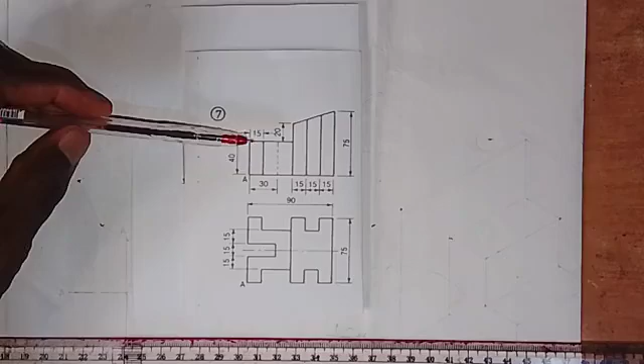Back to this channel. Here we are going to be working on the conversion of these orthographic views into isometric view, as these views are given in first angle orthographic projection. This is the front elevation and this is the plan.

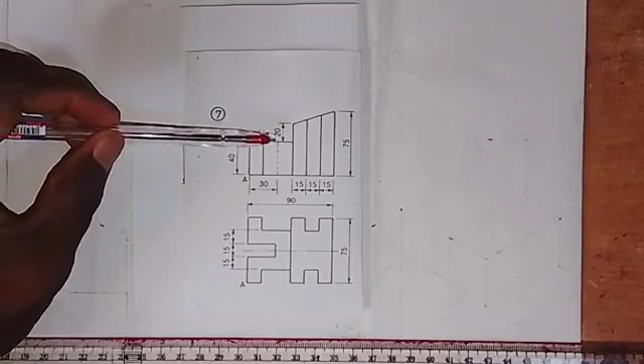For the dimensions on the front elevation, we have that from here to here is 75, and then from here to here is 15. This is 15 from here to here, 15 from here to here. And then we also have that from this point where we have this short dash line to this end, we have it to be 30 millimeters. From here to here is 40, from here to here is 15, and then we also have that from here to here is 20. Okay, that is for the front elevation.

The lowest point is indicated with letter A here, and in the plan, we have that from here to here is 75, the total from here to here is 90, and then we have that from here to here is 15, from here to here is 15, from here to here is 15, and the lowest point is also indicated here with letter A in the plan.

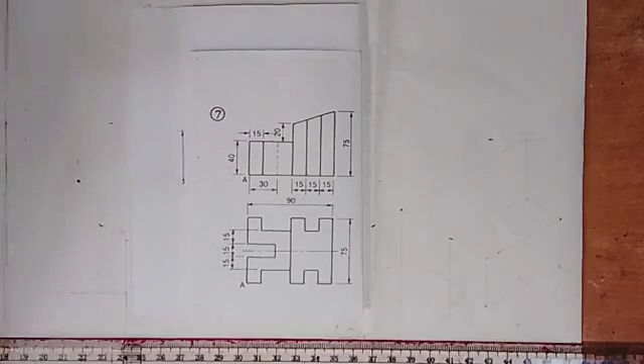So we are going to do this work this way by producing the shape of the front elevation without this line, without this line, without this short dash line. So let's see how this can be done.

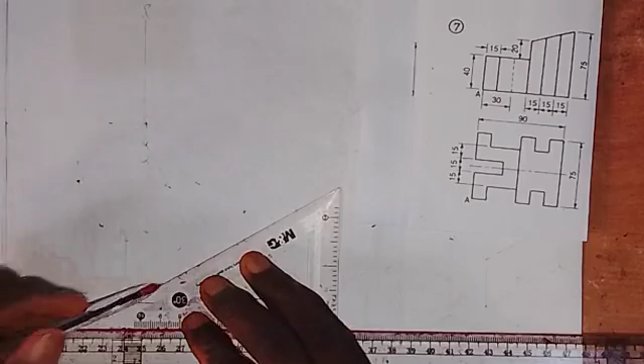So what we are going to do first is draw a short horizontal line here like this. Okay, then with my 30-degree set square, I'm going to draw a line in this direction from this point, and then at this point I will draw a short vertical line up like this.

Okay, then I'm going to indicate the lowest point with letter A as we are given in the front elevation and the plan. So this is letter A here as the lowest point.

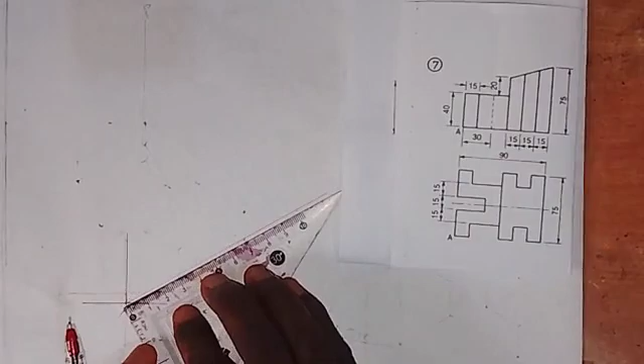Alright, so as I said that we are going to produce the shape of the front elevation, that's what we are going to do. So let's first of all take the measurement of 90 millimeters from this point A to this end. This is 90 millimeters here, and at this point here I'll take a measurement of 40 millimeters up to this point. Okay, so this is 40 millimeters.

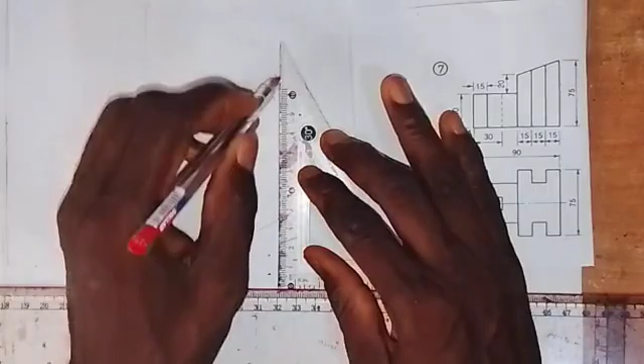So I'll come to this point here where we have taken this 90, and I will draw a vertical line from this point up like this, and then on this line I will take a measurement of 75 millimeters from this point. So this is 75 millimeters.

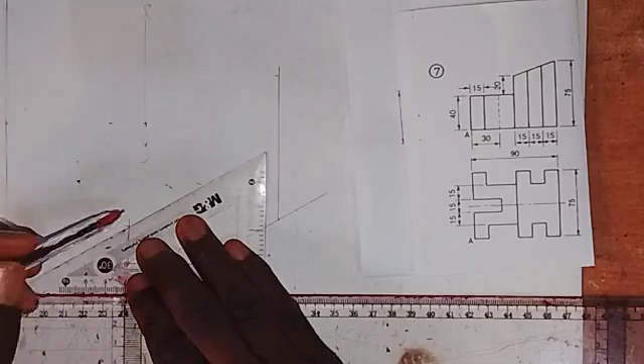Okay, then I'm going to come to this point here and I will draw a line from here. Sorry, not a horizontal line, with 30-degree set square I will draw a line in this direction.

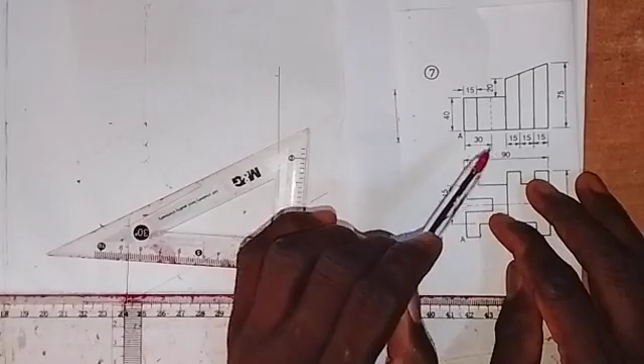All right, so then the total length from here to here, I need to work it out. So here we have that from here to here is 30, and then this is 45. That is from here to here 15, from here to here 15, from here to here 15. That's 45. 45 plus 30 gives us 75. So it means that from here to here is 15. So that is what we have there, so that means the total from here to here is also 45.

So I'm going to take a measurement of 45 millimeters here, from this point. So this is 45 millimeters here. So at this point here I'm going to draw a vertical line up like this.

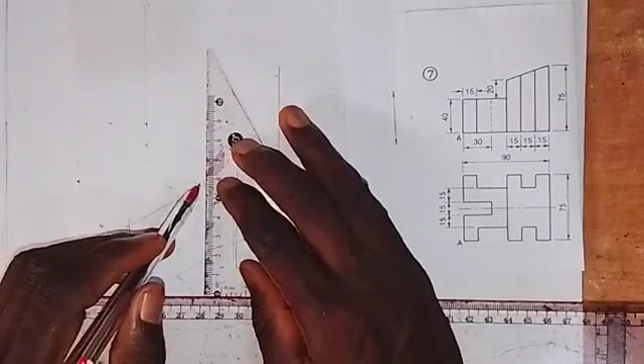So this is a vertical line, and I will take a measurement of 20 millimeters, as we are told that from here to here is 20 millimeters. So I'll take 20 millimeters on this line. This is 20 millimeters. And then so where we have this 75 here, I'm going to set my set square like this.

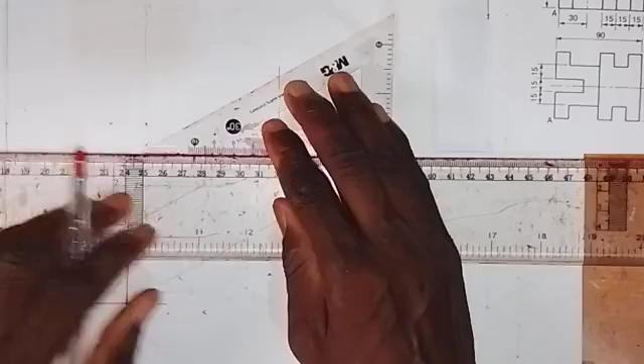Okay, then I will draw a line from this point in this direction, draw it forward like this. Okay, so this 20 that we have here, we are connecting this point together. This point where we have this 75, I shouldn't have drawn this line, I didn't really look at that.

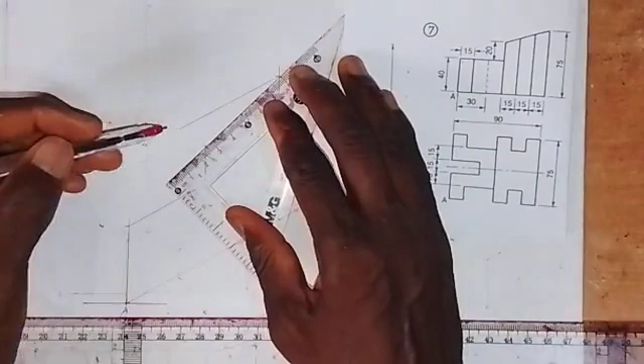So we join this point where we have this 20 and where we have this 75, we join them together like this. So look at what we have here, this line is not needed. So look at what we have, look at the shape of the front elevation.

Apart from the lines that I said I'm not going to draw, we have the shape of the front elevation in isometric view. This is an isometric view, while this one is what is in orthographic view.

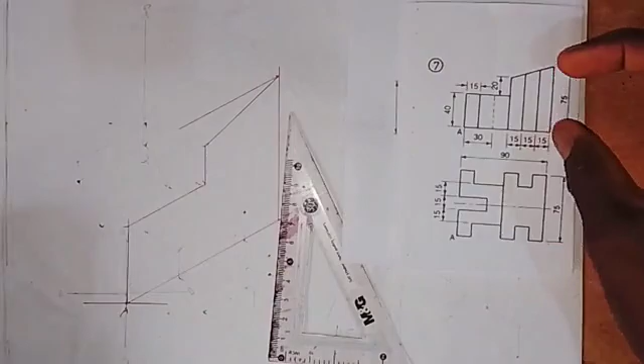All right, so let's go and bring out some things. What I want to do first is do it this way before I bring out these shapes that we have here in the isometric block.

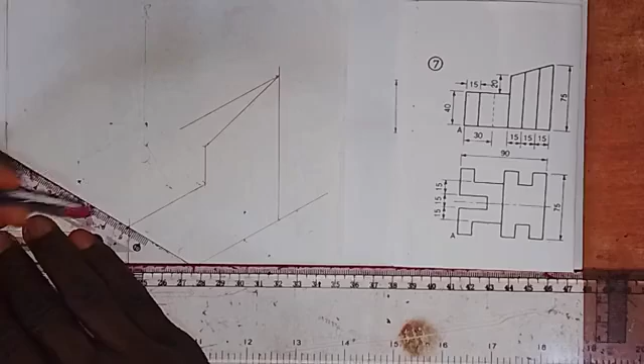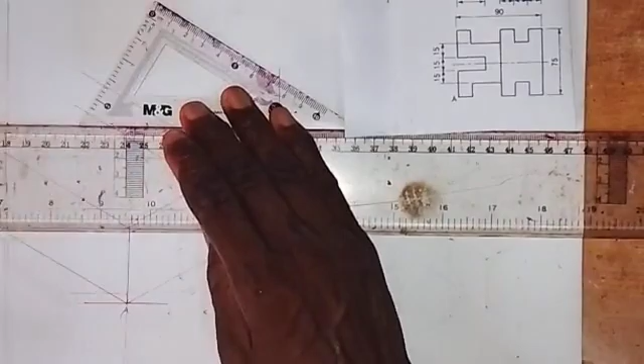I'm going to draw a line from this point in this direction. Then I'll come to this point, draw a line in this direction, and coming to this point here, I'll also draw a line in this direction. Then coming to this point, I'll draw a line going in this left direction, and then from this point, it goes in this direction.

So we have this now. What I'm going to do now, the length from here to here is 75. So I'm going to take a measurement of 75 millimeters from this point, extending it. This is 75 millimeters here. At this point, I'm going to draw a vertical line, so we draw a vertical line from here up.

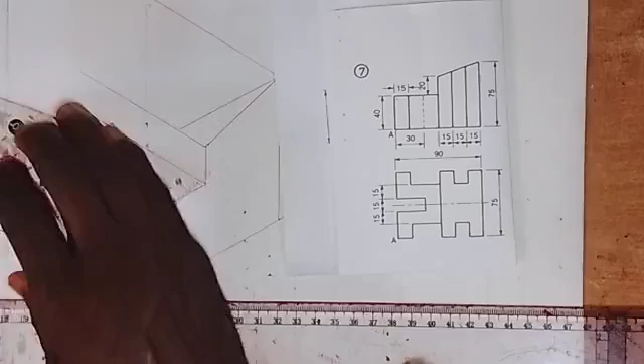Then I will transfer this 75, so transfer it here to join with this, and then coming to this point here, I will also draw a vertical line here to touch this line.

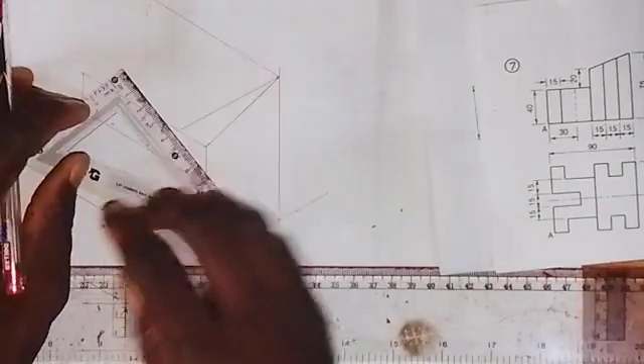Then I need to come here because this line is a non-isometric line. As a result, we need to take that 75, so we can't just transfer this to this. We need to draw a line like this here also on this side.

So what I need to do is take a measurement of 75 millimeters again from this point. So this is 75 millimeters. So I'll be joining these two points together like this.

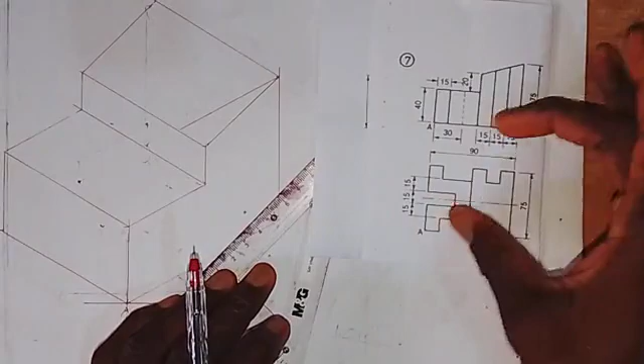All right, so this is what we have as a complete isometric object. Now we need to bring out these features that we have here, and that is what I want to show you how to do now.

Let's start with this feature that we have on this side, then we also work this, then we come back and work this one, and also work on this one. So let's start here, from here to here.

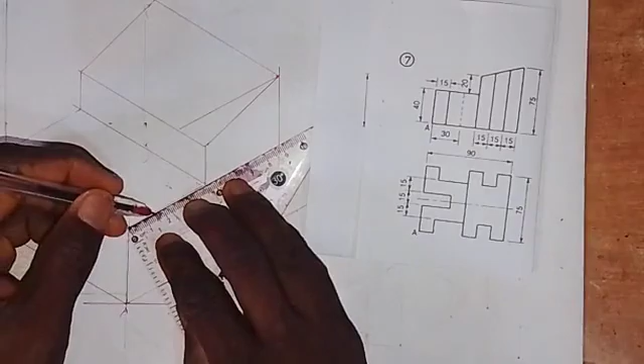So the distance from here to here is 15. I'm going to take a measurement of 15 millimeters here. So this is 15 millimeters. So we have that now.

So what I'm going to do is also come here. I can just transfer it, but I want to come here instead - I don't want the lines to be too many. So I will take 15 to this side. This is 15 millimeters, 1, 2, 3, 4. Okay, this is 15 millimeters here.

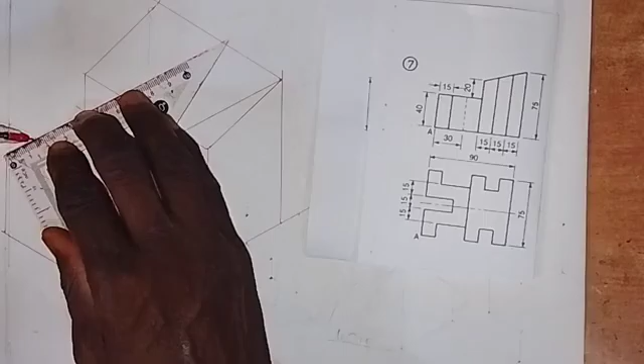All right, so I'm going to draw a vertical line at this point, like this. Okay, we have this vertical line.

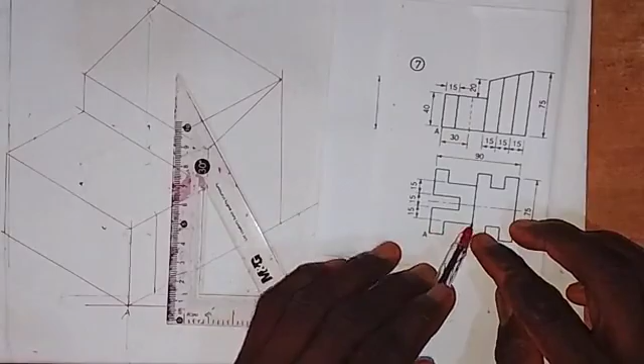Then so we have that from here to here, so is 30. You know I said that from here to here is 45, because from here to here is 15. So from here to here is 30. So this 30 is what we have here.

So what I'm going to do is we need to draw a line at this one. So this line has to come down like this. So we need to take this line down. Okay, so we have this now.

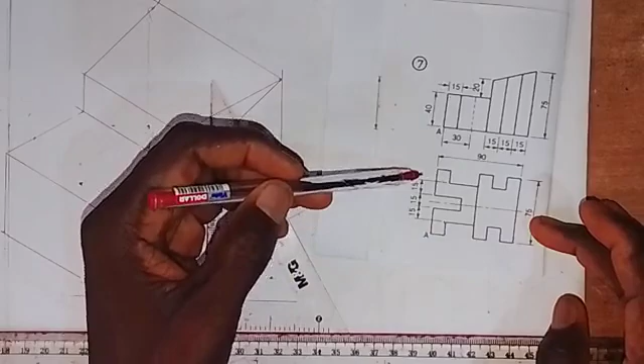So this goes in. The distance from here to here now, as we have that, this is 15, 15, 15, so that's 45. Another 15 gives us 60. Then this is 15 from here to here, so I need to draw this line.

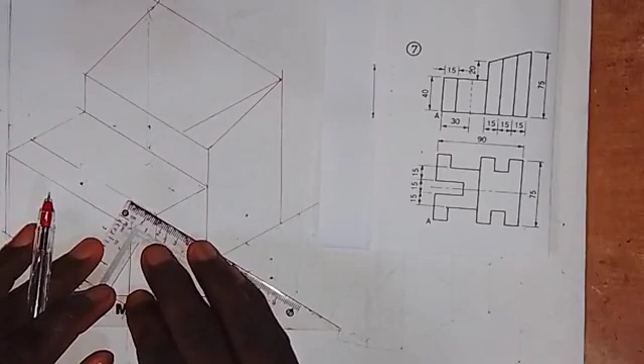I will still transfer this line, this point to the other side. So let me transfer it, taking it in like this, and also taking this in. Then I'm going to take a measurement of 15 millimeters from this point. This is 15 millimeters. Then I'll come here also and take a measurement of 15 from this end. This is 15 millimeters. So I'm going to transfer this point.

So we transfer it here like this. Then coming to this point, I will also transfer it in here like this. Okay, we have this now. So we have that.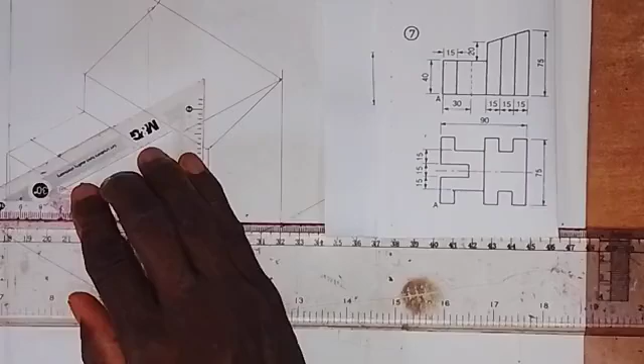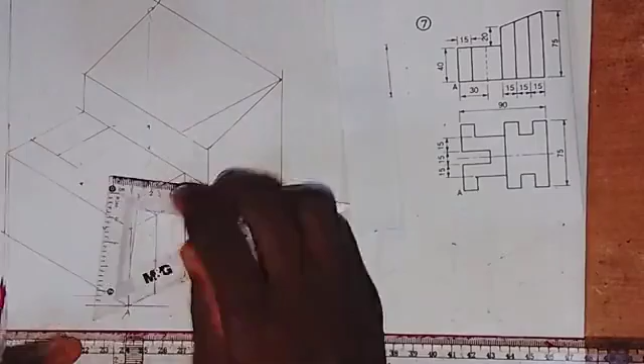So the next thing I'm going to do here for the feature that we have, for that cut we need to show it clearly. So I need to come to this point and draw a vertical line down here. Drawing this vertical line down, I'm going to transfer this point here, and then we set like this, and draw from here to touch this line.

So we have brought out this picture that we have here. What we are going to do on this side is take this line down to touch this line like this. Okay, so if you look at this, the picture is already there for that part.

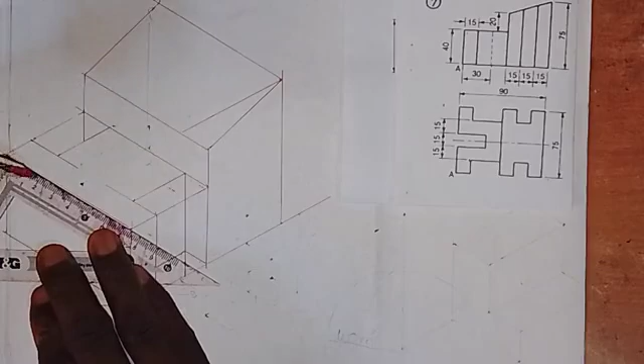Then let's work on this one. So here in the middle, okay, we break this 75. So for this 75, I'm going to take it like this. So we have what we have. I'm going to take 75. If I take 30, so 30 to this side, okay.

So this is 30, okay. Then from this point, I will take 30 to this side, so that we can have 15 in the middle. So this is another 30 here. So we have 15 millimeters in the middle.

So I'm going to draw a vertical line at this point. We draw a vertical line at this point like this, and then coming to this point, we also draw a vertical line like this, okay?

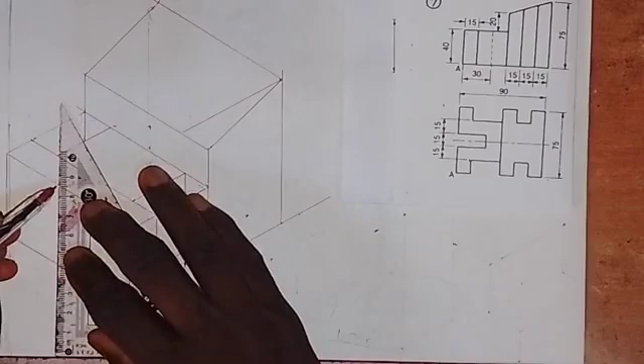Now we are going to transfer this point, so we take it in a little bit like this, okay? And then here also, we also take it in a bit like this.

All right, so this line that we have here, if you look at it, this line from this end is 30 millimeters. So I have to come onto this line like this and take a measurement of 30 from this point. So this is 30 here.

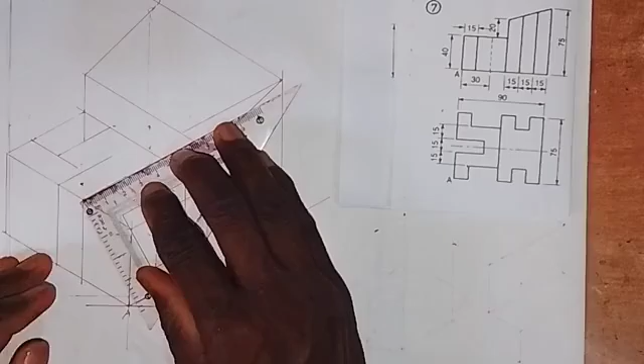So I will transfer this to the other side. It goes like this, okay. Then I'm going to draw a vertical line from this point to touch this line.

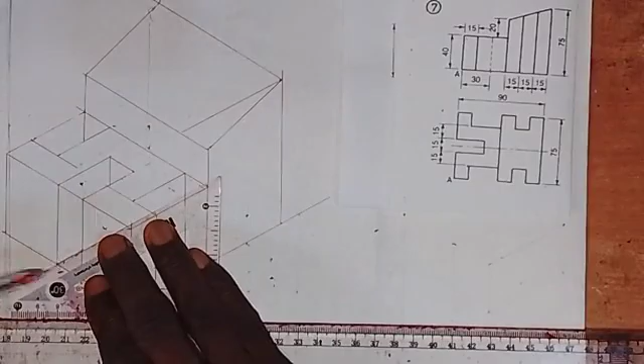Then I will come here and transfer a line, draw a line from here to here. So this feature, and this feature, they are already here, okay. So what we are left with is what we have here on this side, okay.

So we have to come here now, as we have the total from here to here is 45. So I'm going to take 15. This is 15 millimeters here, and from this end I will take 15 millimeters forward. So this is 15 millimeters here.

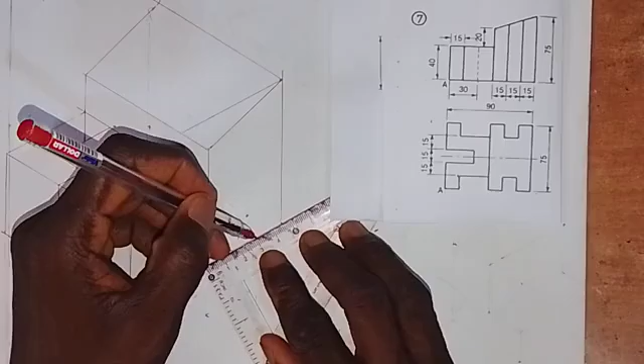So at this point, I'm going to draw a vertical line to touch this, okay. We draw it to touch this, and then I will come here and also draw a vertical line to touch this. All right, so then it goes in also by 15, along this line, okay.

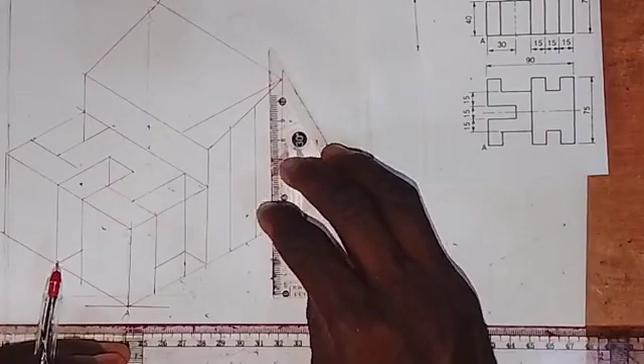So what I'm going to do in this case is that I'll just come here to take a measurement of 15 millimeters. Okay, so I'm still working on that. So I need to see that distance very well.

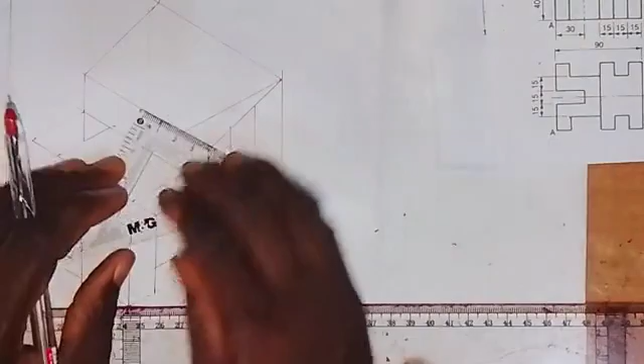So I want to make use of this set square to take that measurement. I will take 15 to this side. This is 15, and then come up here and take a measurement of 15 millimeters. So this is 15, okay. So here I'll just set my set square like this, and then around this place I will draw a line like this.

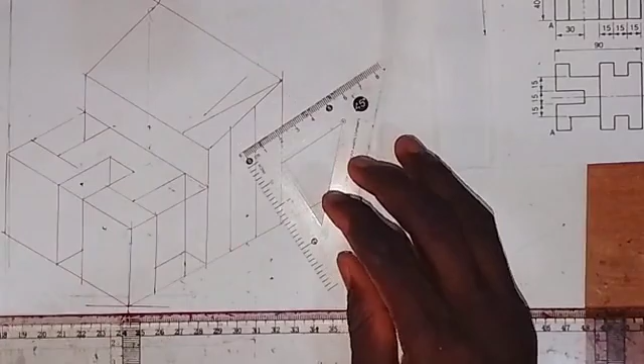All right, so let me just take it, let me take it like this, okay. So we have, let me draw them to touch each other. So we have this now.

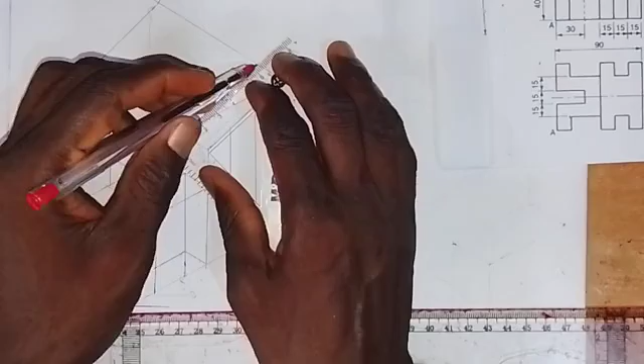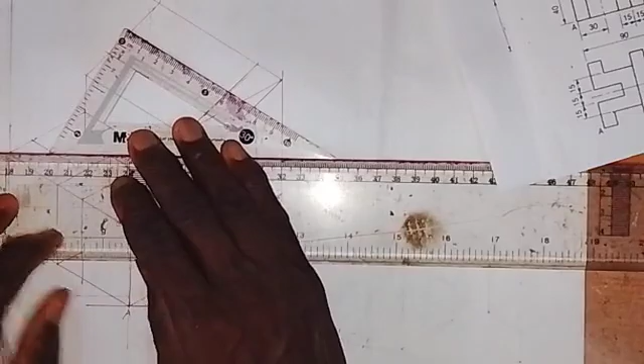All right, so what I'm going to do is that I will now use my 30-degree set square to transfer this point, so transfer this point, okay. So I will draw it to touch this line. Let me just come here and do the same thing on this side too, and also draw this, okay.

So I have this coming down here. I also need to draw a line from here to touch this line, okay. Then at this point here, so I will draw a line that will just come down and merge with this, okay. That feature is already there.

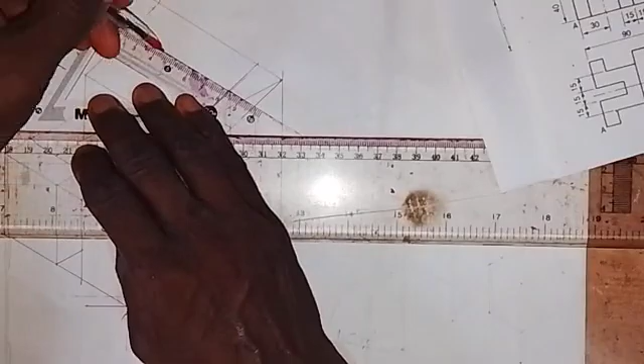So on this side, I need to transfer this point also to this side. I'll take 15 millimeters from here, 15 millimeters inward. I will also come here and take 15 millimeters the same way. Then we draw this and join it together like this.

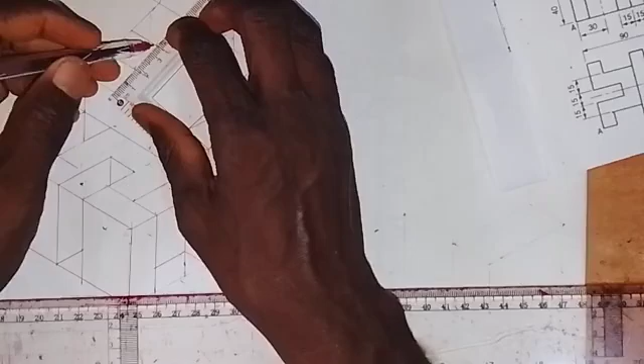Then I'll come to this point and draw a vertical line like this. At this point, we draw a vertical line. So the feature is there, everything is there. Now what we have to do is bring out the thickness of the outline edges.

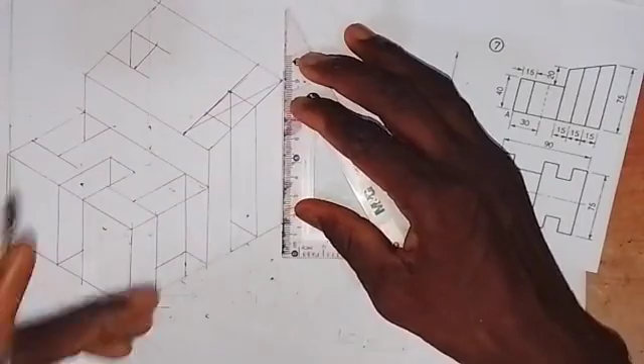So we need to make this a vertical thick line, and this also should be made a thick line from here down, then come here. So the whole of this line from here down to here should be made a thick line. Okay, so we have this, and then this line here, we make it a thick line.

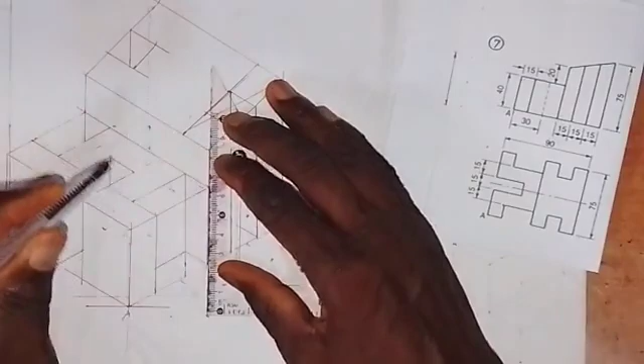All to this point. This line also make a thick line from here to here, and then this line should be made a thick line like this, and here we also make this line a thick line to this end here.

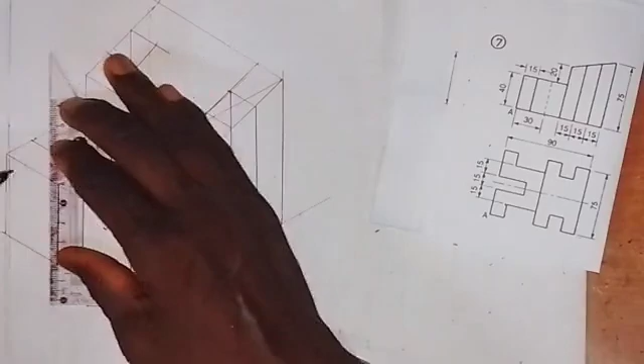So we make this line a thick line like this, and we also make this a thick line like this, and this line also I need to make more visible, and this line, so we make this a thick line from here to here, and this line also should be a thick line from here down.

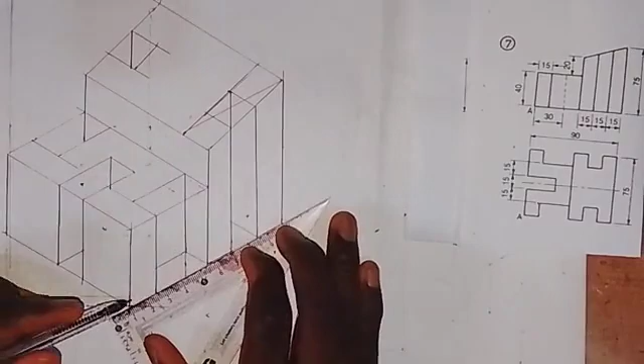I think all the vertical lines we have blocked in, and we still have one vertical line here. So coming here, this line from here to here, make it thick, and also this, we make this thick, and this line also make it a thick line.

So this line here, make this a thick line from here to here. This line, make it a thick line from here to here. We also make this a thick line from here to here, and this also should be a thick line, and then this line is a thick line from here to here.

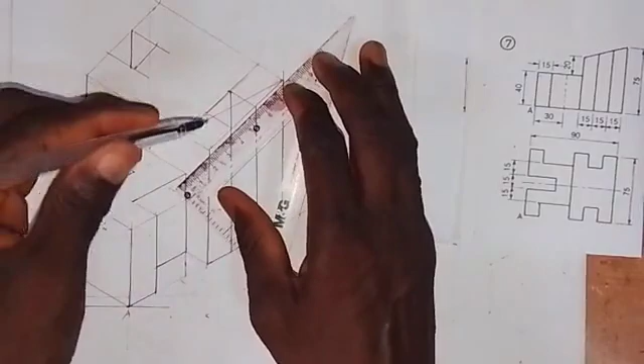Alright, what else do we have? We also need to make this line from here to this point a thick line, and from here to here a thick line, and this line should also be made thick from here to here. We do the same thing for this, make it thick from here to here, and this should be a thick line from here to here.

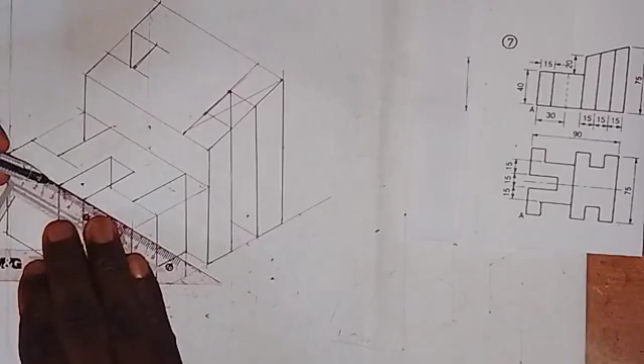Coming to the front here, on this side, make this line a thick line from here to here. Then this line should be made thick from here to here. Coming up here, we do the same thing, making this line thick, and making this line thick from here to here.

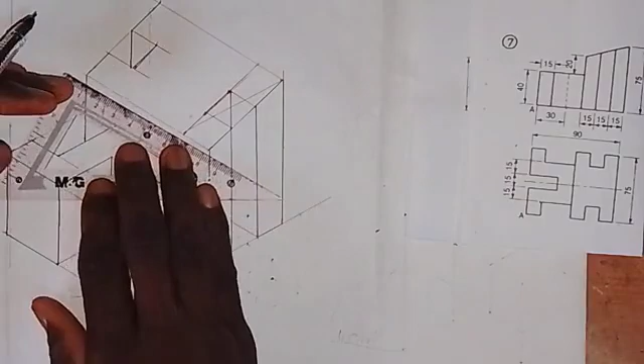Then here also, make this line a thick line, and this line should be made thick too. Then the whole of this line - looking at what we have here, this line from here to here we made a thick line. Then we come up here, make this line a thick line from here to here.

We have this, and then here also, make this line a thick line from here to here, and this also should be made thick. Then coming here also, make this line a thick line from here to here, and this line a thick line from here to here. Then at the back here, make the whole of this line a thick line down to this point.

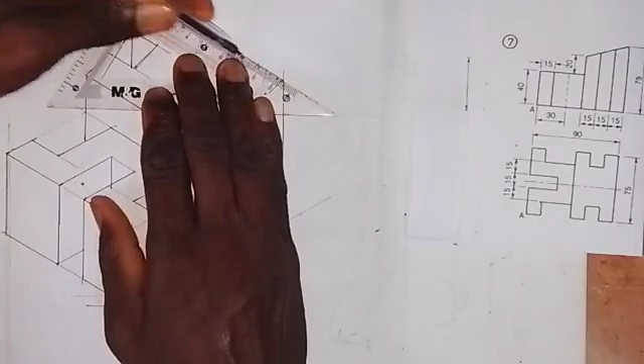What else do we have? I forgot to make this line, so we make this line a thick line from here to here, and also this line here has to be made thick from here to here. I forgot this line too, so this line should be made thick from here to here, and this line should also be made thick from here to here. So look at what we have.

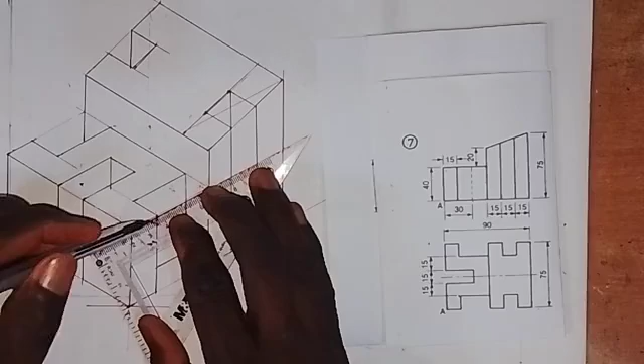So this is the isometric view of this object whose orthographic views are given. As you can see, it is as simple as I've done it here. All you have to do is practice and practice this, become a master at this work. Thank you, keep on practicing, and God bless you.